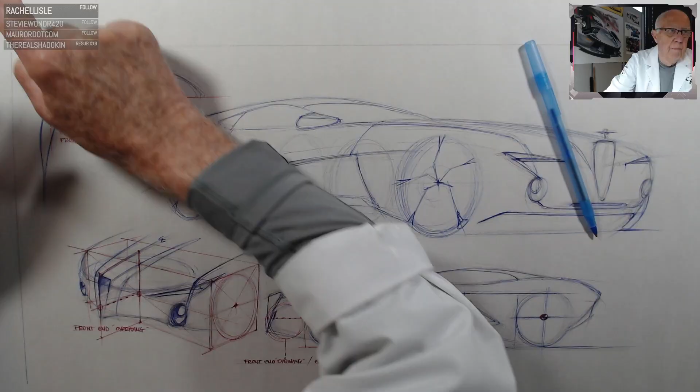I think this has been a really interesting set of programs. These last two sessions, we went through phase one and phase two. Phase one dealt with the box system, how to set up a 1, 2, and 3, and the automobile proportion work, and how to work it into a 1-point setup. Then this past Tuesday, we went into a 2-point series covering how to put the proportions together, getting the wheel counts down, getting the widths correct, and how to use facing planes and other elements to determine good proportions in vehicle design.

Again, it's not just about transportation design, but good fundamental thinking and using perspective as a solid tool is an extremely powerful and helpful approach in every single case. As I said Tuesday during that whole program, I think one of the most important things is that if we have a good fundamental understanding of perspective, how it functions, and the rules that are set in stone and truthful, and if we understand how to work with those, it's extremely liberating. You know where you are at all times, and you have a good understanding of how to move things through a crisis or difficulty that might come up.

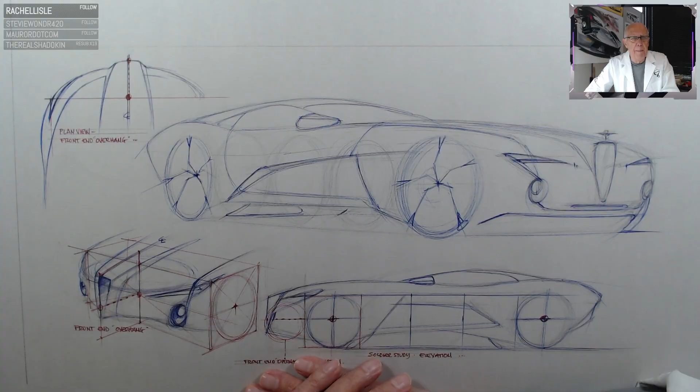So enough said. I think it's really interesting that we've gone into phase 3 today, and I'm going to spend some time on this stream. Hey, Shadokin, how are you? Good, how are you doing, Chief?

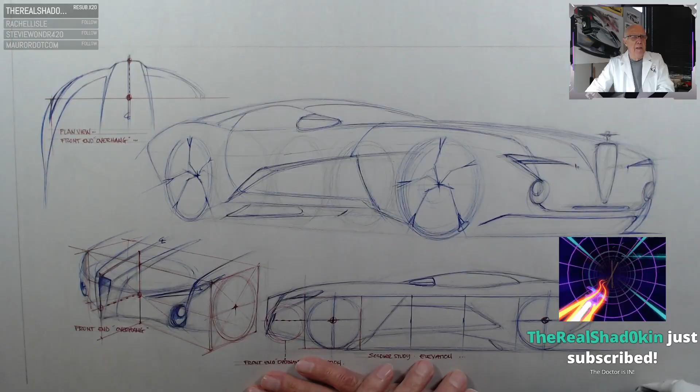Thanks so much for the subscription, it's good to have you on board. Hope you're doing well, Shadow. You're working at home today? I'm trying to come back and survive here with phase 3 and some transportation stuff. Yeah, it's good to see you too, Shadow.

But I think it's important to go back and look at this whole discipline from the point of view of how fundamentally solid it is to get the proportions down. Working with a lot of young people over time, even in lectures and workshops, I had a lot of questions about how you set up the wheel program, how you set up the proportion, what the width is like, how you do these things. So that's what motivated these last 2 or 3 streams.

And this is phase 3 today. As I said earlier, I want to concentrate on 2 things basically in the stream today: reinforcing the idea of 3 wheels in between the perspective.

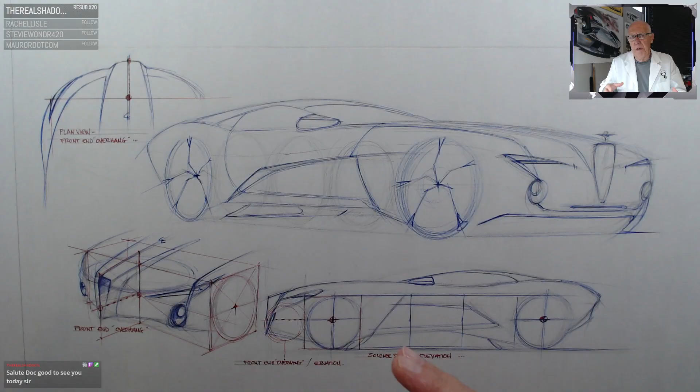Hey, hi Rachel, how are you? Good to have you on board. I just noticed you picked up a follow here, Rachel, and I'm really glad to have you on board. I hope all is well with you. Are you home back in Carmel now, Indiana? If so, congratulations. Super to have you on board, and thank you so much for joining me today.

Even though this is a transportation design exercise, it still applies to a lot of different things you're dealing with in product design, architecture, interior space, and exterior design as well. So we'll take some time to go through some things. I really want to stress how critical it is to get that wheel plant down, the widths down, overall heights and proportion. And the most important aspect we didn't talk about on Tuesday, but it's very critical as well, is how to work with center lines, how to set up a center line and work through it, how to let that determine how proportions come together.

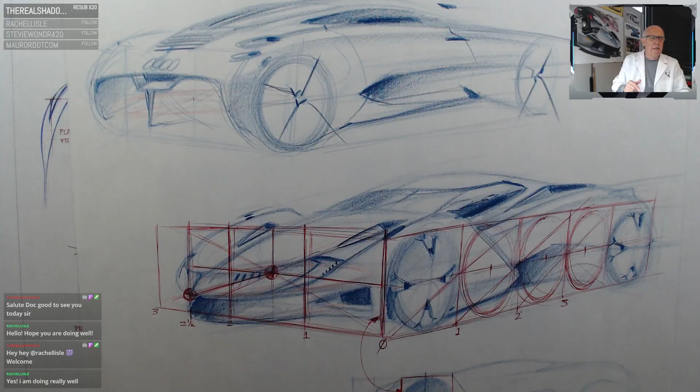This is something we did on Tuesday of this week, and I really want to bring this to your attention. This is again the beginning of how to set up a perspective program: getting that leading edge down, coming back in perspective with the drive line, then coming back 1, 2, 3 wheels to get those 3 wheels between the front wheel, and setting that rear wheel down.

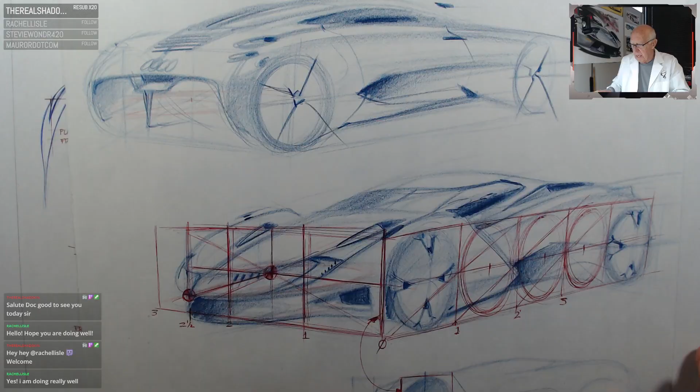A good friend of mine called me Wednesday morning and said he really appreciated how I explained setting those widths up. Let me show you what happened here. The reason I'm bringing this to our attention is that in this conversation, when I was working through it on Tuesday, I came out to this leading edge area, but I used the center line.

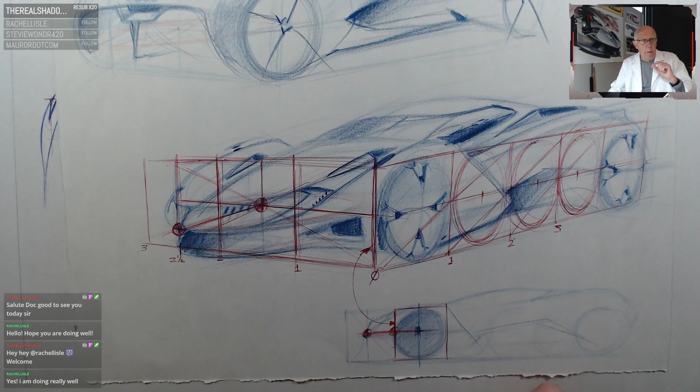If you notice this elevation down here, to get the overhang set up, I came through the center line of the wheel, which is back here. Well, truth be told, my apologies, that should have come off of this facing plane here, which is out here, not back at the center line.

So I want to make sure I clarify that before we get further. You can go with the center line, that'll work, but it sometimes gives you a real long drag from the center line to the overhang.

It's much easier to come back to this facing plane right here, which is now called a facing plane in 2-point perspective. Find its perspective center, which we did here. Then from that point, notice it's the tangent of the tire out in perspective, draw that point, and then right back in perspective and bring it forward. There's my overhang right here, which is now reflected from here to here.

So I want to make sure- hey, Rachel, how are you? Rachel from Cincinnati. I've got Carmel, Indiana, and Cincinnati all in the same group. Hey, by the way, Rachel, did you get the sketch I sent back to you yesterday on the little product design piece you sent me? Hopefully that worked out okay for you.

So again, back to this conversation. I just want to make sure I clarify the error I made on Tuesday about using the center line as opposed to the facing plane edge off this leading edge in perspective. To illustrate, this is where it really happens off this facing plane. You come forward in perspective like we did here to pick up the overall overhang, then come right back to center line and work that shape right through. So that's where we started there with that guy. I hope that clarifies the situation.

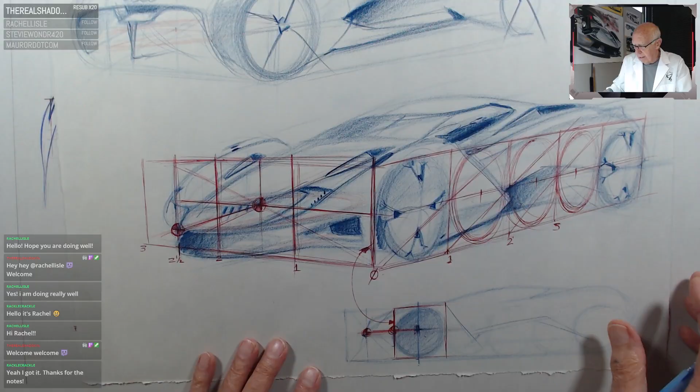Before I leave the sketch, I think I plotted it out a little more accurately. Traditionally, to get the right width, good news, Rachel - thanks very much, I'm glad you got that, I hope it helped you. But I think the thing that's unique about this sketch is I went back and put some notes on it.

The question came up yesterday from a good friend of mine: how do you determine the widths? He said he was amazed at how I opened that up and set that up. Now, I want to be careful here - the width is set up on the cube basis. This is the face of a cube on the right-hand side, face of the cube on the left-hand side.

If you set that cube up on the right-hand side, then its partner is to the left. So always remember to come back 1, 2, 3. Now, a good width is to set that thing right in half, and then at that point it becomes two and a half cubes - the face of a cube is a good way to set up that width. We'll go through that throughout the course of the afternoon so you can see how that begins to function.

Now that doesn't mean it's set in stone. For an exotic machine, lower, wider, you can open that up and stretch it a little bit, and I'll show you that a little bit later as well. But a good rule of thumb is to always keep in mind 3 wheels between the actual wheelbase itself.

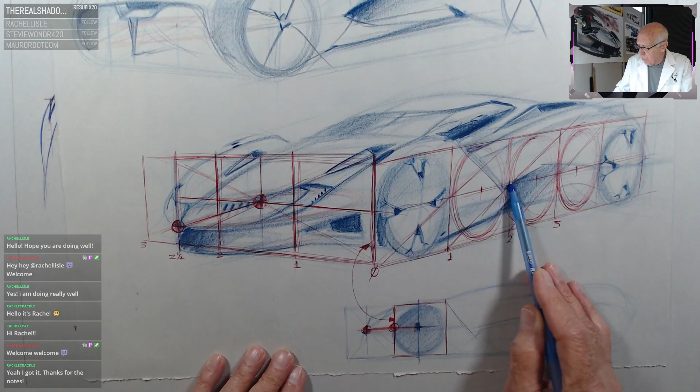So you plant the first wheel, go 3 back, and then set that 4th wheel in place. As far as width is concerned, come back 1, 2 to 3 to cut that 3rd cube in half, and then there's your center, there's your width right there. If you keep that inside that boundary line, your proportions are going to be very solid all the way through.

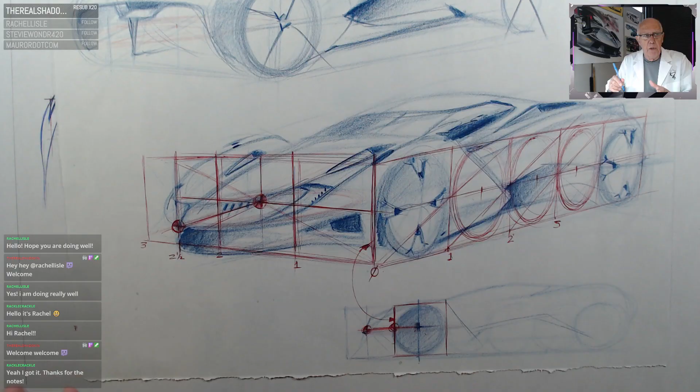And I think that's a critical point to get across, because there's nothing worse than setting a perspective study, for example, that has the right proportion and wheelbase, and all of a sudden it's too narrow or way too wide. And that's a real big problem.

Another interesting thing about this whole setup is that once we establish that width and get that center line to work here - when I started here, I went through this radius. I used that circle inside here to determine where that point of reference was for overhang. And I came out of that and went right back through it again. What helps me do that is this.

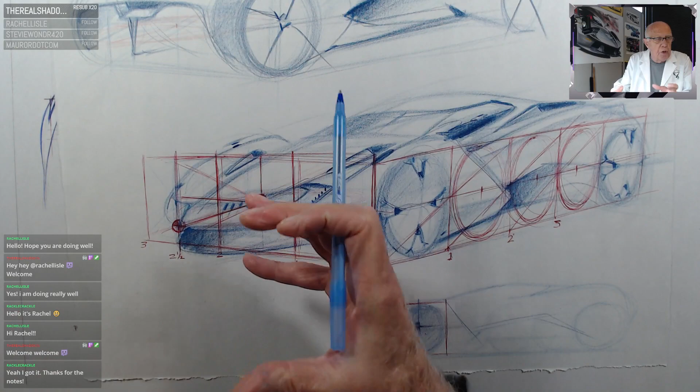Notice I see an awful lot of the headlamp graphics over here. But as this surface rolls away and comes away from my eyeball, or my sight line, nothing gets, it all disappears. But so often, if we're not doing this properly, what happens is we see this lamping system here, and we want to do the same thing on that side, which really twists the whole thing, and the whole sketch. That's what really becomes a real difficult issue here.

So again, I just want to go back and use this sketch as a clarification for yesterday's comment about, again, not the center line, but the facing plane edge. Run that through in perspective, find out where you are, then come up forward and begin to pick that overhang up from that point of view.

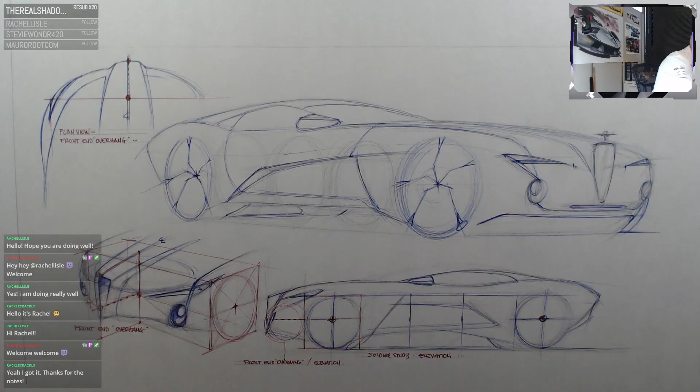So let's move ahead here. Let's move the sketch here. Let's get these out of the way. I put this sketch together again, real quick little thumbnail study here, a much larger sketch. Again, notice once I got that first wheel down, I went 1, 2, 3 back, got the rear wheel back in place. And this is a pretty good gesture study in terms of a typical process and elevation, or a little bit of 1-point perspective how it operates.

But what I thought was interesting again is I went back. Let me move this over just so we can see what this is doing right about there. How's that? Good? Okay. This elevation now begins to tell me that, again, notice here's my face of the cube. Here's my circle or wheel. Again, counting 1, 2, 3 back to get that 4th one in place.

But notice here again, coming off that facing plane tangent, that dotted line represents how much overhang I'm going to have when I go into perspective. And I'll show you that in just a moment here. So that overhang becomes very critical.

Now, this view here, and again, perspective shows us this. Here's that leading edge. Here's that facing plane I'm referring to right there. So that then now I find its perspective center, which is right there. And then from that point, come out in perspective. Notice that perspective line is, let me draw this for you here.

That perspective line follows the same suit with the drive line out here. Notice perspective, perspective, perspective - they're all compatible. They all go back to that vanishing point that helps us begin to operate here to put this thing in proper perspective. So once again, facing plane, and again, use that circle again for overhang.

How far I'm going to come out. I came out in space, that distance, found that vertical, and from that point began to build the rest of the shape around that whole form. So again, here's a good illustration.

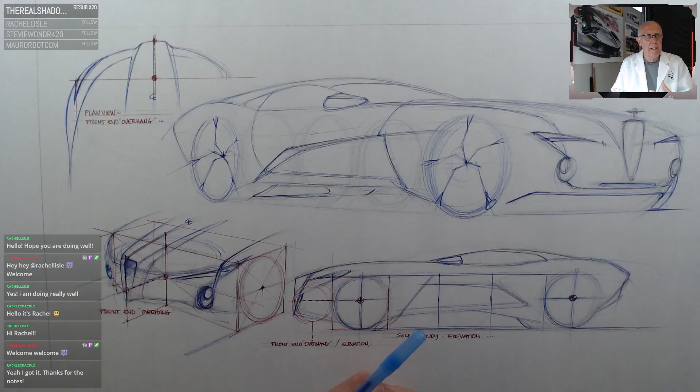Again, that facing plane becomes critical. I step out and get my overhang, and I begin to build that surface around that. And another way to look at that, here's a plan view of that whole setup. Here's that facing plane. That point there is that same reference line here. So what I've done is come right back to center line, stepped it out, which is now this distance and also that distance, created the shape around it, and again, right back in and used my center line here to build the rest of the form, which gets into this little hood graphic element that we see on top here.

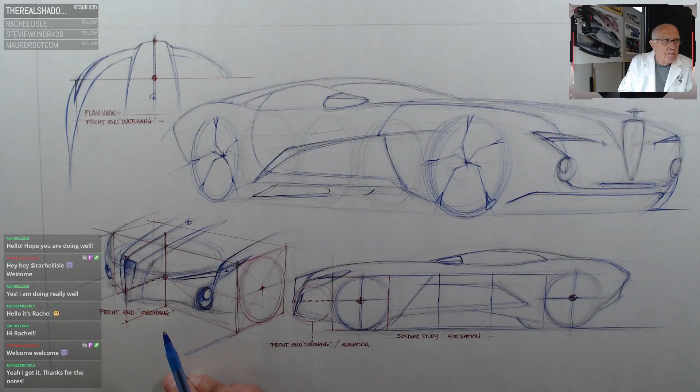So I hope that begins to tell us, for example, the reason I started with the sketch here today is because what it really dictates to us and cries out for us to think about is this: when you're dealing with a two-dimensional surface like paper, think in the third dimension. What does it look like in the plan view? What does it look like in perspective? What does it look like in elevation?

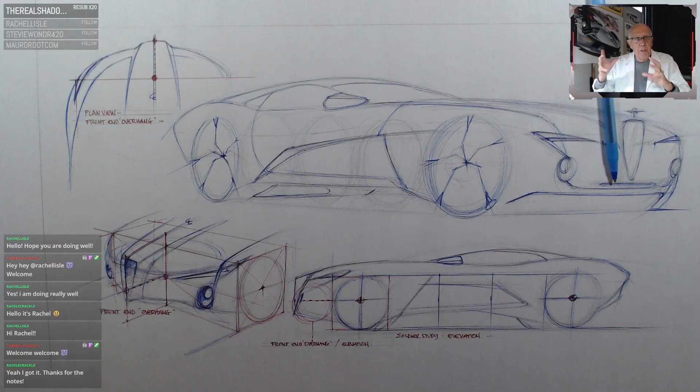All these elements are coming together, and it's exhausting in some respects, but at the same time, if we teach ourselves to think in that third dimension, all of a sudden things begin to open up, and you begin to see how one step goes to another and how one leads to another.

And I will not deny one iota here, the beautiful thing about perspective and understanding it, the more you begin to understand it, the more you can flatter it and make your sketches far more powerful. You can take advantage of what you understand. And I've always said this over the years as well, with a lot of clinical work, I make this very clear.

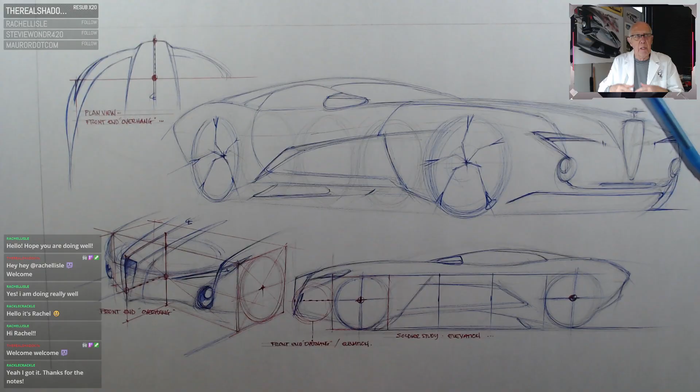If it ain't broke, break it. Just break it and go in there and look at some things that are much more fundamentally sound, from the point of view of really not exasperating yourself, but liberating yourself from the understanding that you've got it now and you can put these pieces together.

So I think this phase 3 piece today about getting spacing correct, widths correct, and using center lines to develop the proportion of vehicle design is going to be very, very helpful to you. So I'll come back to this in a moment here.

Let's go to this, a couple of sketches here. Now let's go to this guy. Lay these out ahead of time so we can get some good conversation and hopefully some chat going together here. This is an isolation here, for example, of what we're talking about.

This would become my leading edge right here. Now I'm going to go to widths. This little illustration here helps me get to the widths now. Now that I've got the circle in place, I've got that face of the cube, I lay that in place.

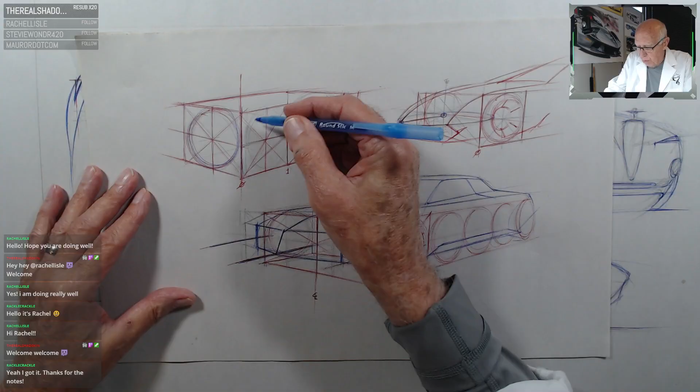I come again, this is now the left-hand side. I'm going to come to the right-hand side and create 1, 2, 3 back. Now we're going to find that perspective center and open that up, and that point right there, that designation right there becomes my width. Now we'll show you that in a moment.

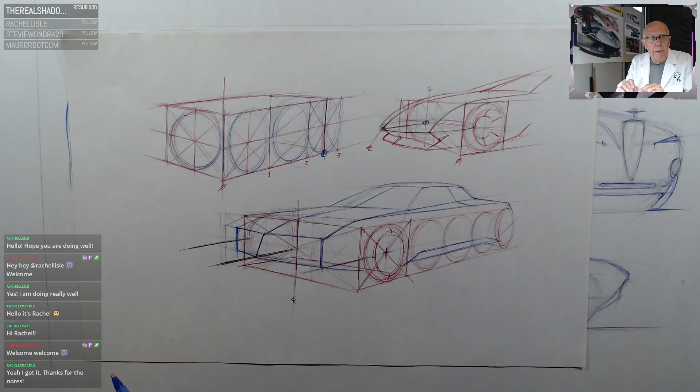Just a couple of illustrations here as to how to begin to put that into practice. We're going to start looking at not only the width proportion, but how to set up the actual scale and how to develop perspective using center lines, how to guide our way through these sketches.

Now let's turn it around here. Same thing. This is now my leading edge here, my 0 reference. I'm coming back in perspective here. There's my face of the cube. I come back in and rotate that out.

Now notice, once again, I'm drawing through it, and there's a backside wheel over here, but notice there's a circle in place here. Again, let's use that point of reference. See that point right there? I take it across in perspective, find my center line on that facing plane, drive it up, put that circle in place, that tells me where my center line is.

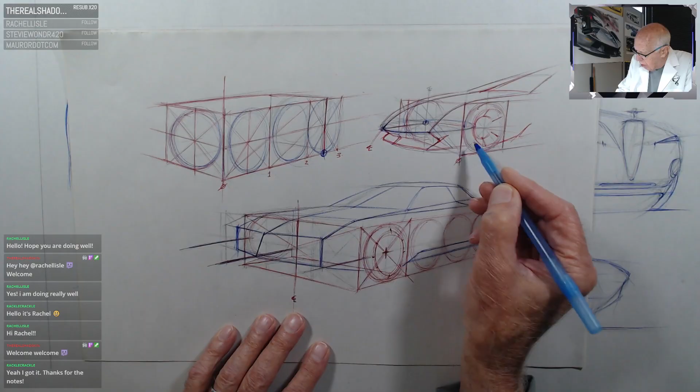Now that I've got that, I can take that center line and come right on up into the form, into the windshield, into the far pillar, closed pillar, body form. Again, come back in section underneath and roll that right out of there and get this shape, simply putting it in place. And I think that's the beauty of perspective.

Once you begin to see how the geometry works, the sight envelope opens up, and all of a sudden things fall into place naturally, because you've got a footprint to follow, a section form and an element to deal with, as well as getting the proportion right in the wheels. And again, the center line is very critical. So that's one being very organic.

Let's go a little bit sheerer here. Same setup. Again, facing plane, face of the cube. Get that one wheel down, 3 back, rear wheel. Now draw through it, pick up the width.

There it is. That's actually 2.5 back, because there's my first one, here's my second one, here's my third one. And I've cut that right in half, and there's my point of reference right there.

Now, same thing. What I've done here is come off of this shape and pull the line out in perspective. Now, my facing plane is right there, so I'm going to come back from there out to the right here. There's my overhang right there, that line right there. I'm going to fill that in. Here's my overhang.

Off of that normal facing plane, that's it right there, no problem. I've just moved it from that reference to that reference. That tells me from that front face there, I've opened that up considerably.

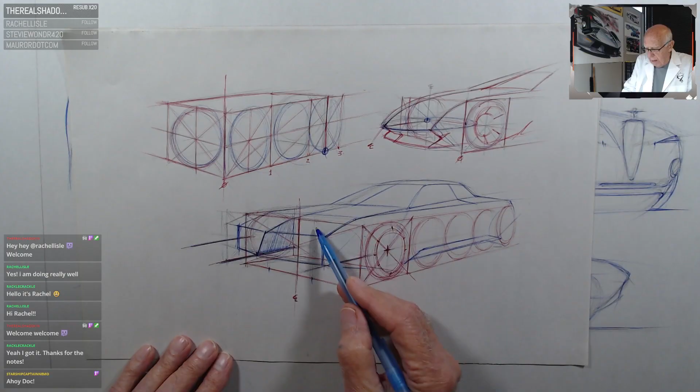Hey, Captain Nemo, how are you, man? Good to have you on board. How you doing? Thank you, sir, for joining us today.

This is just phase 3, getting some transportation design work done using the fundamental geometry of perspective to create aesthetics. I think that's what we're after here, to get the widths down, the lengths down, overall heights.

And again, notice once I have that whole overhang set up here, now I set up a section, come right back. Here's my center line, notice right back to that contact point, which is right there. Back to center line, up onto the hood surface, into the windshield, and then over the top.

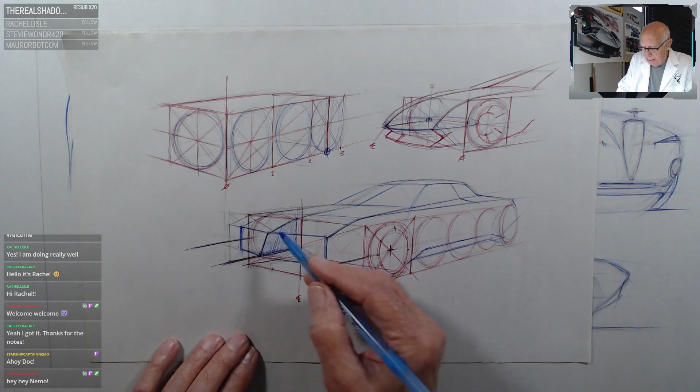Now I can use that as a setup here. Off of that set, I come out here at section, draw that line through, pull that line through into ground clearance, draw these lines through, and get these proportions all set, and it just all falls into place because I've got a clue line here.

Hey Nemo, good to have you on board.

So I've got some steps and some reference points here to really do some interesting work with.

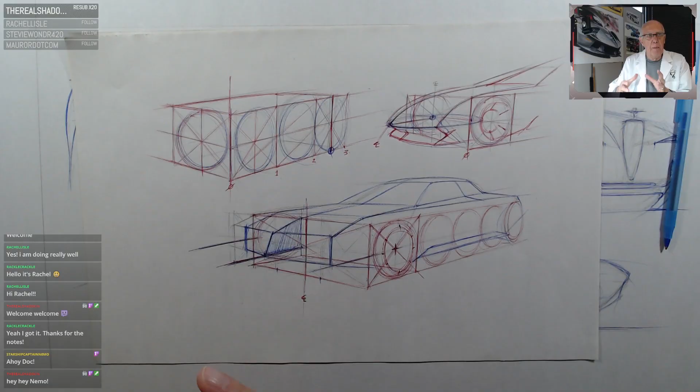It all comes down to understanding how the geometry works and how to work with this stuff. I'd rather know where I am as opposed to guessing where I'm going. I want to know step by step what's really beginning to happen, especially with something as complicated as transportation design. The more we understand how perspective works, when the mechanics begin to operate, the more fundamentally aesthetic we become, because now we understand it, we can apply it, adjust it and flatter it as we go.

So there's a little study there on basic setup for getting that overhang squared away. Next sketch up is this. I've done this ahead of time to save some time, looking at basic formats for SUVs, pickups and so forth, and how they all begin to work together. This phase gets a little more complicated, so I'm going to take some time to go through it, showing each step along the way—where I got those widths, how I got those lengths, and overall heights.

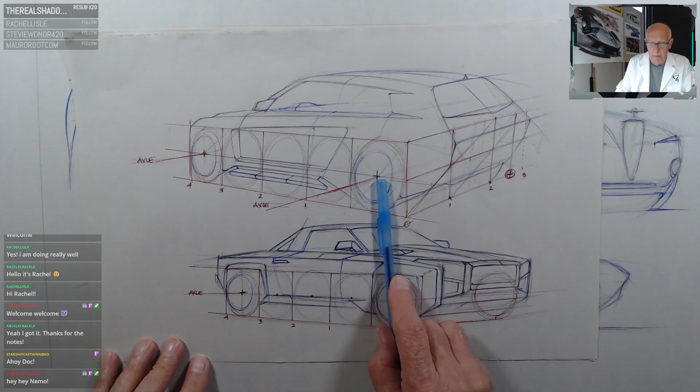Once again, I started here—here's my leading edge, I'm standing right here looking at this vehicle. I'm going 1, 2, 3 back to get that fourth wheel in place, driving an axle through in perspective. That's going to tell me how to put together the wheel geometry. Now that I've got that in place, I can come across here and go 1, 2, 3 wide, come back to center line, pick that up.

There's my overall width right there, which tells me where the wheel's going to be planted. I draw that through. Now I come back to center line off of this shape—if this now becomes my center, I'm going to open that up and really begin to draft that through and open it up a bit. Notice the overhang exceeds the width of the vehicle—that's fine, that's your rear overhang, that all comes into play as well.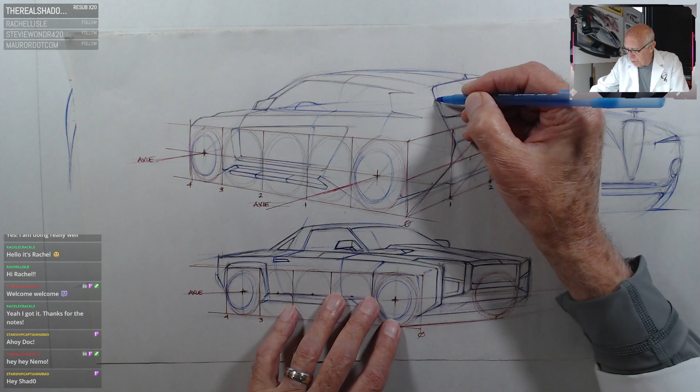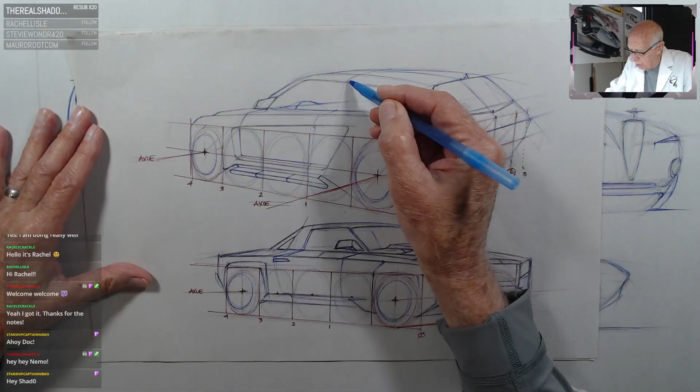Notice I'm coming off this backlight down to a break, into a lower, into a break, and I take that right across in perspective, drive it under and come back underneath it, beginning to use that center line. Everything's coming back to that center line as a result of knowing where that width is concerned. Back to upper, through it at the center line, using that as a contour into section, into shoulder, into contour section—how it all begins to fit together. Learning how to see, it all comes down to understanding what the side envelope does.

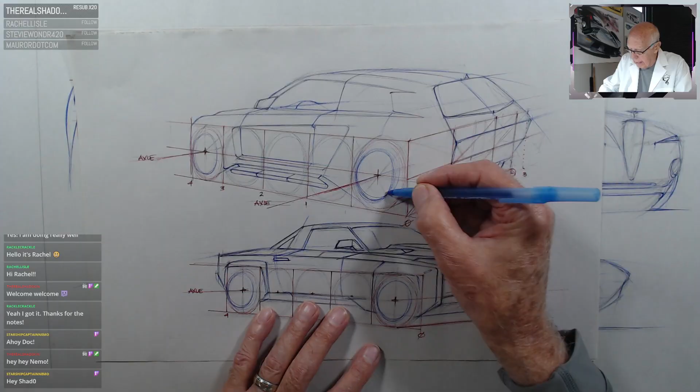Let's go through here—the reason this axle is so critical is, now that I've got that, I can come back in. If I want to drive the axle or wheel geometry back in space, I'll come back in here and go into the negative. Now that tells me that section comes out, goes in, comes out and back out again. Now that I'm here, I can come back up vertically—that drops back, about right there. I can come up vertically, put the wheel geometry in place, that told me how to set that rim up, for example.

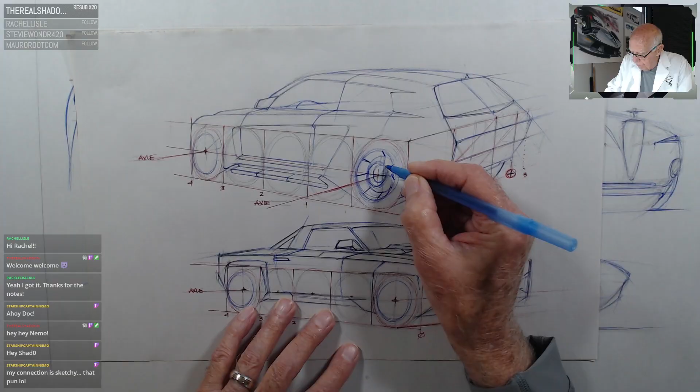Now I can go back up. If I want to come back out again, it's now this—that section now changed from that, in, up, across. If I want to go back inside again and begin to use those elements. Look how that whole process set up, that whole setup—my connection is sketchy, that pun.

Hey, it gets good—but see how that all begins to operate? Again, using the same principle up front here, let's go back in and set it up. Back in, set it up here, center, break it, come back out again and set that up. Now use those elements, get a bit more graphic, and come back out again.

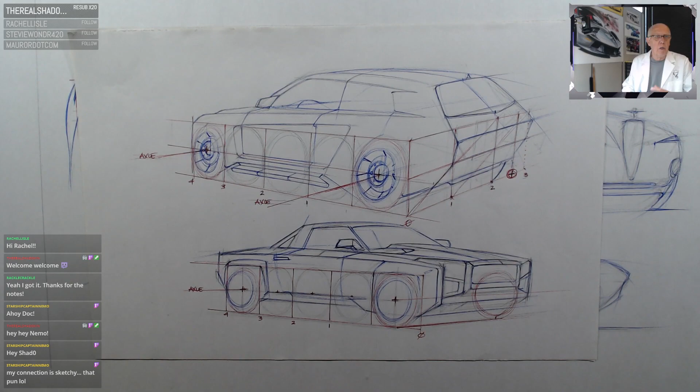And again, take that back inside, then go 1, 2, 3, and I get that same detail up front there. All of a sudden, it all comes together in terms of putting this together. Notice the geometry—even in cases like doing wheel geometry, it all begins to come down to understanding what the axle does, and every one of those circles are concentric around that basic wheel, as we started here.

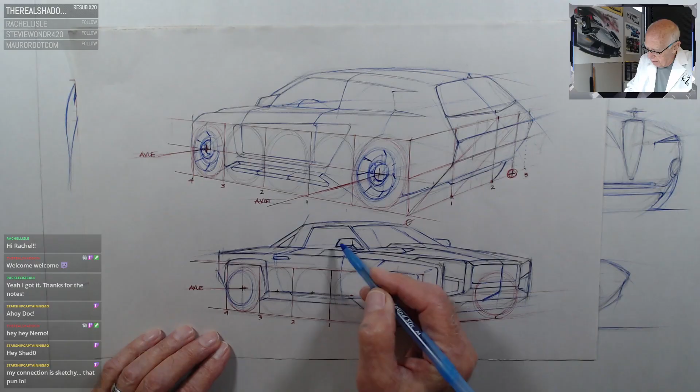Now let's move this guy here. We'll pick up the same process again—3 back, getting the body form in. Now notice here's my center line, so I'm going back in here. There's my center line. It comes down to that point, rolls underneath, comes up over the top. This is a tight view here, but that center line goes into the windshield, and over the top, that center line has told me how this windshield gets wider, narrower, back in again, over the body section, comes in.

And all of a sudden, it all comes together, using that whole geometry setup to redo some interesting things with the actual shape itself. Very, very unique stuff, folks. Again, how critical it is to come right back to the simple elegance of letting perspective do its work for you. It just cannot be denied.

Let me stop here—any questions so far, anybody? Am I going too quickly, or is it making sense? So far, everybody good?

Once again, we're not talking about flamboyant design here. We're just talking about fundamental truth and putting it all together so we can get a better understanding of how all of it begins to function in terms of putting together the geometry.

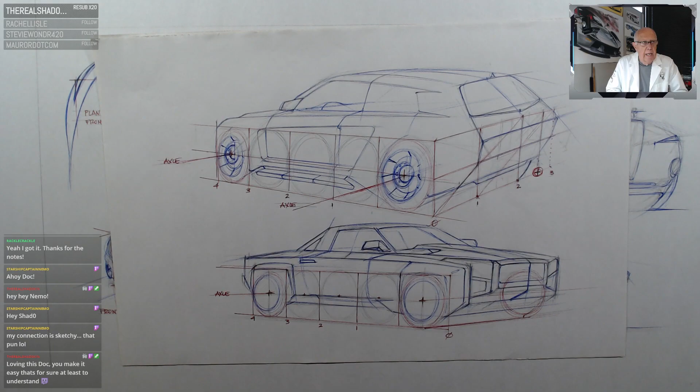And again, loving this, doc. You make it easy—that's really, I hope that's the case. Thank you, Shadow. I mean, I do not want this to become an absolute mind-bending headache in terms of having to remember all these pieces and parts. There's a very simple truth to it.

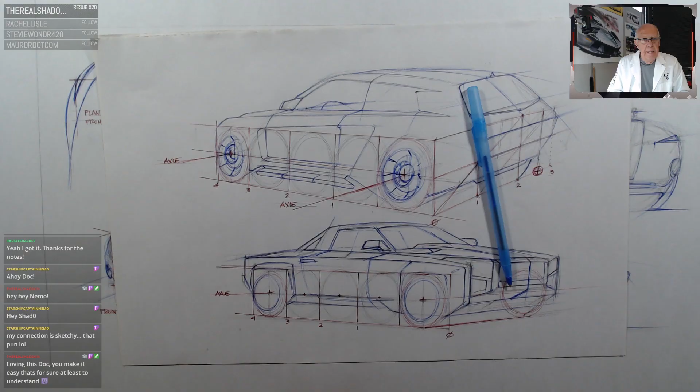Get the wheels planted. I remember guys like Homer LaGassey and Syd Mead, the whole process they taught us in transportation design—once you plant the wheels, everything else coming up off of that from the ground line is correct, because now you've got a good base to work from. You begin to go back to the center line, you build the shape off of that, and it just becomes so much more monumentally solid.

So again, good example of a rear 3/4 view, how to use that same process. Notice, one last thing too, how that whole process of putting the wheels in place begins to taper. Notice it's larger here—as you go back, it fades a little bit and gets a little bit narrower. This width here is a little bit narrower than that width there. Again, that's what perspective does.

Yeah, Nemo, making sense? When I see you doing it, I'm like, how the heck could it be even different? But when I sit in front of a blank sheet... you alright? No, you're doing well, Nemo. I think some of the work you've done has been very inspiring to look at and see. So it makes sense—that's good.

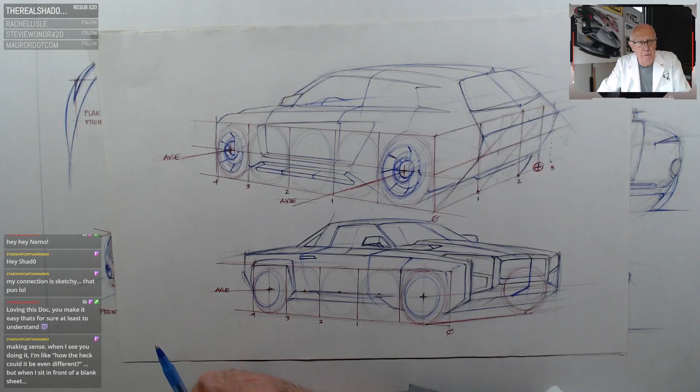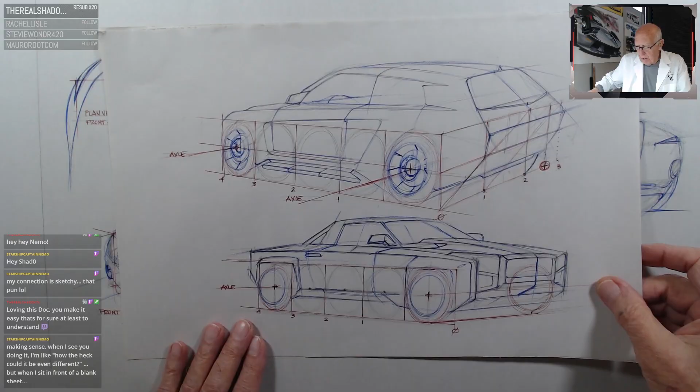It takes an awful lot of conversation to kind of put the pieces and parts together. But I think once you talk about it and start to see how it operates, which we'll do in a moment here, it really makes a huge difference in terms of—oh, I see, it's now this to this to this. So each is a synchronizing system; one thing connects to another. But I'm convinced with all my heart, over the course of my career, it's just been so powerful to know

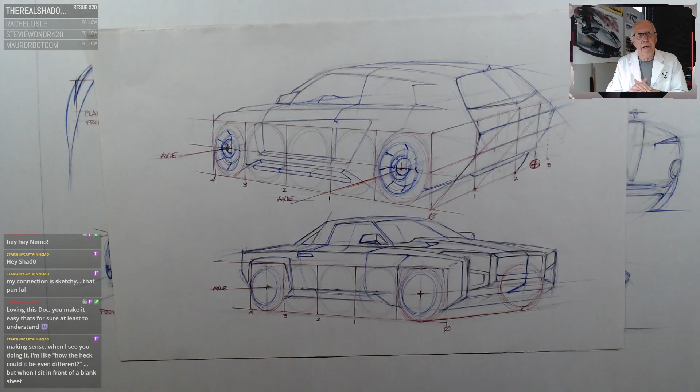that perspective becomes a genesis of illustration. A lot of us try to illustrate something by just guessing at it, and oftentimes we get extremely frustrated, and it just doesn't really work out for us—that's a sad situation to experience. But now if we go through this whole idea of understanding, let's get the geometry right. And again, as I said earlier in the stream, once the mechanics is set, the aesthetics comes in automatically.

So let's move ahead here, and we'll come back to these in just a few moments. Go back and get these guys—there's a little pencil sketch. I want to use this for a moment here, just a real quick sketch. And again, come back in and just reinforce.

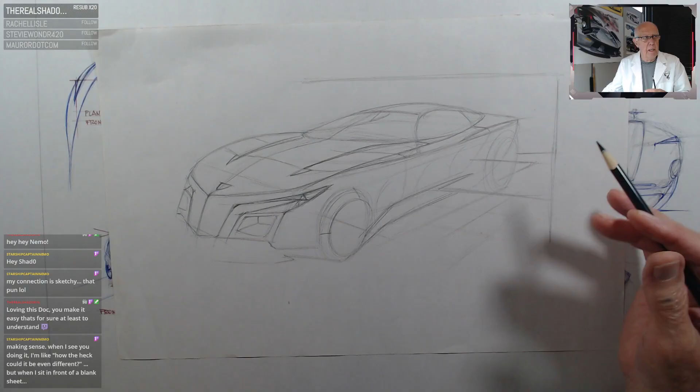I'm going to switch gears here and go to this. I'm going to go back and use some pencil work here. Let's lay this down and put a little more tone to it now, and add another dimension, for example. Now we've got the proportion set. I'm going to take a simple thing like a light source and just illustrate a few little simple things to kind of bring this sketch to life. So let's go back in through here and set the wheels down.

Come back in through here. And again, remember, this sketch was set up using the same process we've been talking about for the last few moments here.

Let's talk about line weight. Get that weight up and then let it disappear. Let's come back in through here, let it disappear. Come back into this tire.

The body form. Take it back out again. Notice a little bit of a spear here. Let's take that into place.

Blister back here. Notice backside line. I'm going to let that go. Notice that weight there, far more different than that is.

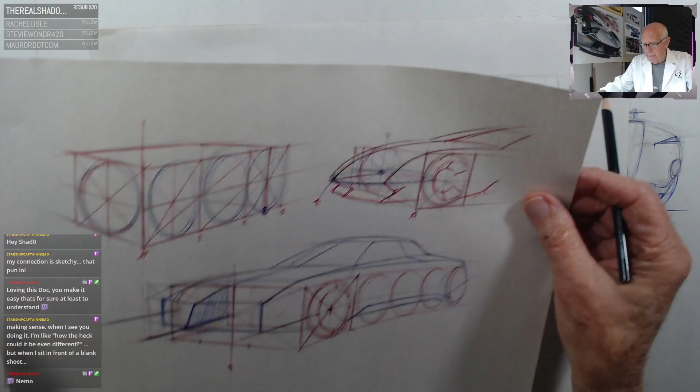Let's come back in through here. There's my reference line here. That line right there is the very same thing we talked about. That reference line right there is the same thing we talked about right here. That point right there. There's my reference line.

If I come down vertically, that's going to tell me where my overhang is. So is that making sense? Very good. Hopefully that's making sense, gang.

Let's carry on here. Let's come right back to the center line. Notice, now that I've got that set up, there's my center line. Draw it through, into windshield, over the top. Again, into fender line. Let's bring this through here. Let's get some of these elements into place.

Pardon the silence here. I'm just going to work on some things.

A little bit of ground shadow.

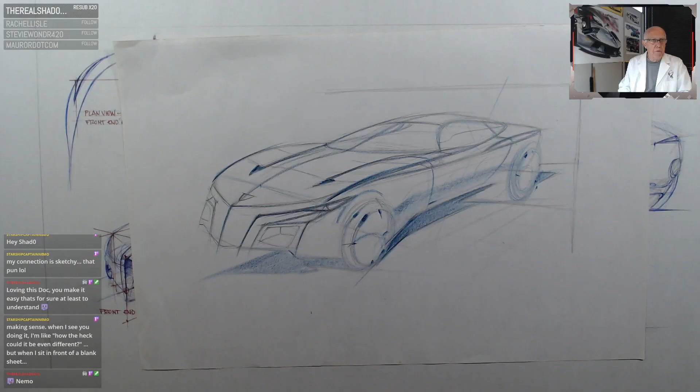And it comes right back in again here, and then draw it right through, and then step it out again, and just let it go. There's a simple little change right there.

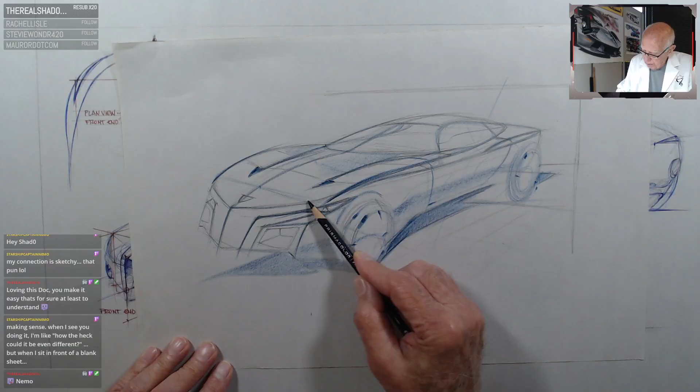Up on top. Now that my light source is coming from behind, that means I can come back in through here and just tone this in, lose it a little bit, come across into that surface here, and again, widen the light source a little deeper in the windshield, take that across.

Now, horizon line, a little bit more boldest, come back in through here, pick up a little bit more pencil weight. Fill that in, and back in through here.

Little front end graphic.

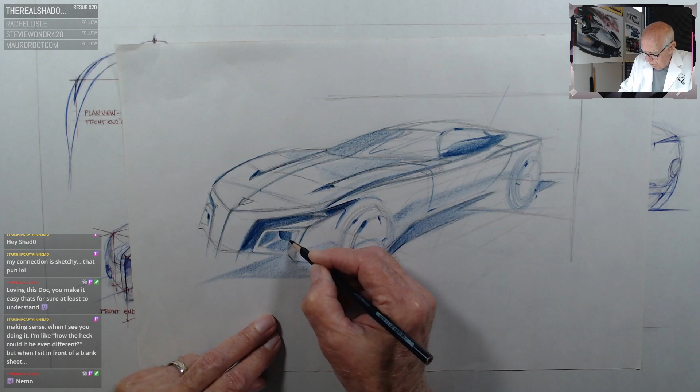Again, coming back in, notice the angle of light, same thing. Shadow. Line weight. And notice right away, that form comes out of the paper. It's very simply done, but hopefully it gets a point across in terms of where that light source is coming from.

Now, back in through here, I can go back in and tone a little bit of the surface, run that in place, put a little bit more secondary line in through here, pick up the windshield graphic, a little bit more tone, come forward, bring it into that forward, and there it is, just a simple little detail there.

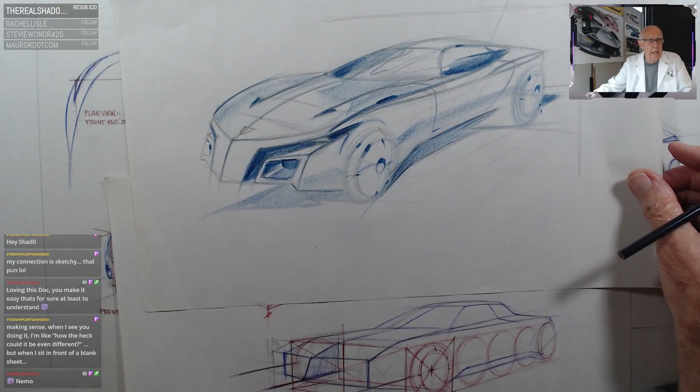And notice shadow, into shadow, and again through, out. Very expressive, but at the same time, all put together on the fundamentals of just letting all of this stuff come together for us. Let me just see if I can get these to work together here. There's one up on top here, and this one down below.

Well, maybe not, let's do this. Now they all begin to work together. This whole process here is a result of knowing a little bit about what this is doing down here. The only thing I've added now is light source and volumes, which hopefully at some time in the future we're going to add to it. I'm going to let this kind of roost a little bit here and work with you guys to get this whole process of proportions down with perspective, center lines, wheel count, and so forth.

So let me stop there for a moment.

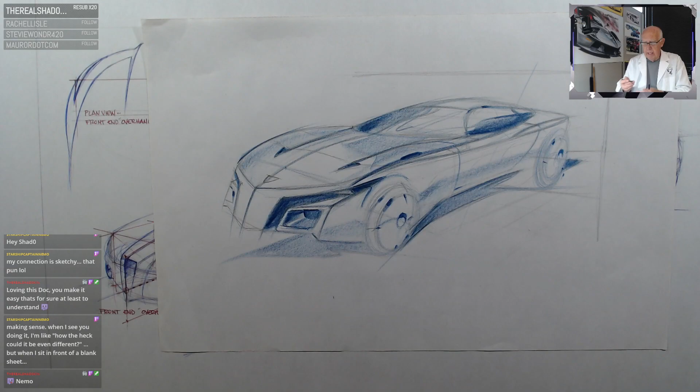Let that settle in. But I just take a little jump ahead here today to show you what might be coming down the line in terms of getting into tone, light source, and volume, and how to work with it. Any questions from the gang in the chat? What do you think, is this making sense? Coming together, how one begins to lead into another. I think the magic of this whole process of perspective and proportion leads us to do things like this. I hope I didn't jump too far ahead with that conversation.

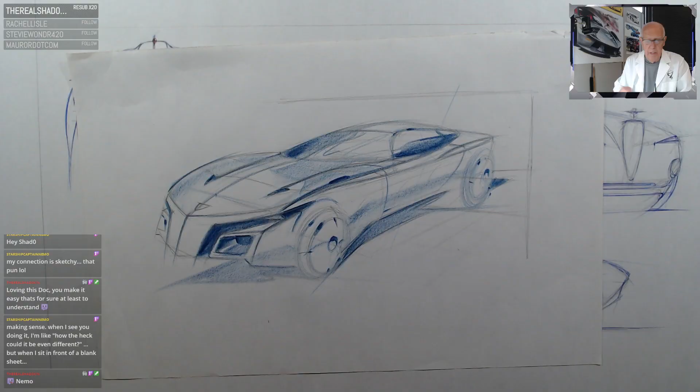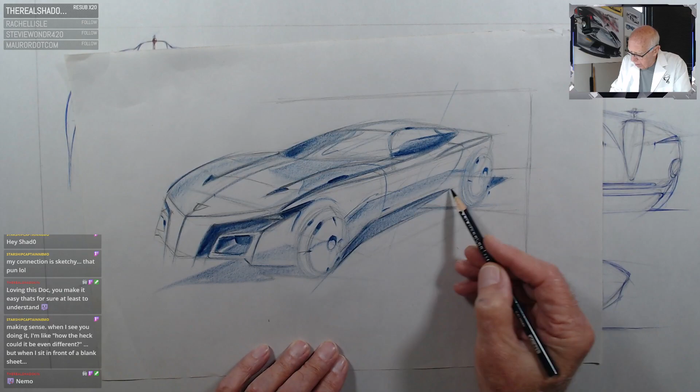Let's put a little bit of tone in this and kind of kill that back, just so that all varies in here. Then you can get back and move with the line weight to flatten what the forms are doing. Just let this all come together. It's very unique in terms of putting it all without a lot of effort. Very simple, notice how much paper is opening up there. We'll get into that later on as I go here.

I'm going to be quiet just for a moment here. Please feel free, anybody, any comments at all. Rachel from Cincinnati, Rachel from Carmel, Shadow, Captain Nemo, what do you think?

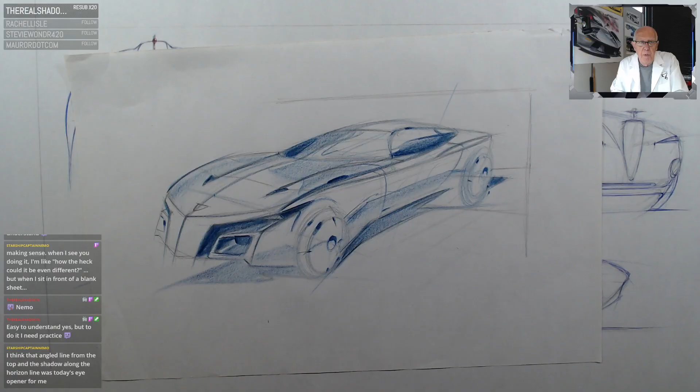I think that angled line from the top and the shadow along the bottom, along the horizon line, was today's - yeah, could you clarify that again? That angled line from the top - oh yeah, this guy right here on top, that becomes my angle of light or direction of light. Pardon me, along the horizon line was today's - yeah, now that I've just dropped that, and that tells me where that shadow is going to drop off of that form.

So if I put a section in here, the shadow really kind of blisters out like so, and that white point tells me where that shadow is. Now this direction of light tells me that the light's coming from the front. The direction is from the front, but the angle is very severe. So the two work in harmony.

We'll get into that stuff later on as we go down the line here. So, but the point is, is it helping? Did I make it clear for us here, Shadow, or pardon me, Nemo? So far so good? It's basically the tangent. Yeah, there you got it. Tangent to the door, you got it.

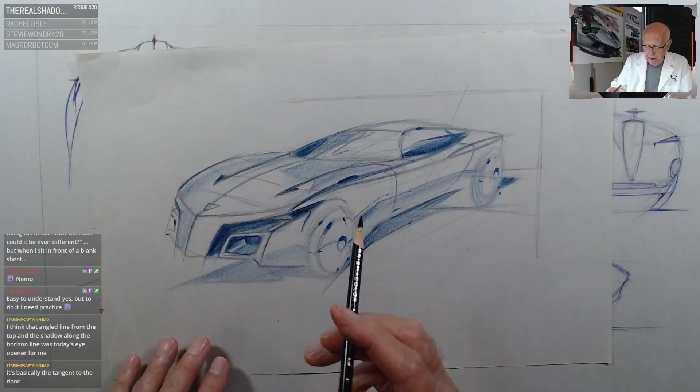Exactly correct. Now I can come back in through here and add a little more tone to this guy, just not to kill it, but to kind of put some surface work together. And again, line weight up front, and let that delve right into that little form right there. That comes back and picks up that widow's peak. There it is, and then out of it again.

Simple little structural pieces that come together here, folks. It's not a great design. I'm just trying to look at how the whole thing comes together in terms of putting all the pieces together we've been talking about over the last few sessions.

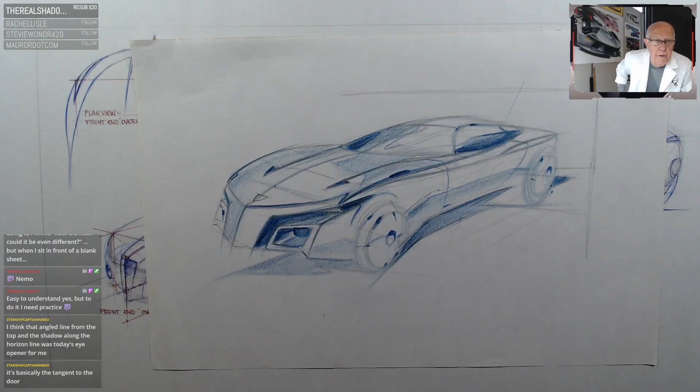Again, anybody, any comments at all? Hopefully I'm communicating this material clearly enough because it can get a little bit very confusing in a hurry. I do not want to be the agent of confusion. I want to clarify some things for us so we can work with it in time to come. Any comments here at all, guys? So far so good?

Well, I hope this is making sense. Let me stop here for a moment and chat a bit. This has been really good and healthy for me as well, because it's gotten back into the situation where, I hope I can say this in the proper spirit, I get to the place where it becomes so automatic that I don't think about it anymore. Please don't misunderstand, it's not an arrogant comment at all.

I've been taught to be confident, and I really feel confident in what I do as far as lines are concerned. Nemo, you are right, never noticed that. Yeah, the angle of light is a tangent to the door. You got it, Shadow and Nemo. Well done, and I'll cite that in a moment.

So what happens is when that comes together, it's just been unique, because I really feel strongly that good perspective is the genesis of illustration, and all these pieces come together as a result of that. So it's light source in the next series. The next series, away from perspective, is going to go into light source and volumetrics. For those of us who do this work, no matter the design discipline, it all begins to work together, whether it's vehicle design, transportation, product design, interior space design, architectural exterior design, or landscape work.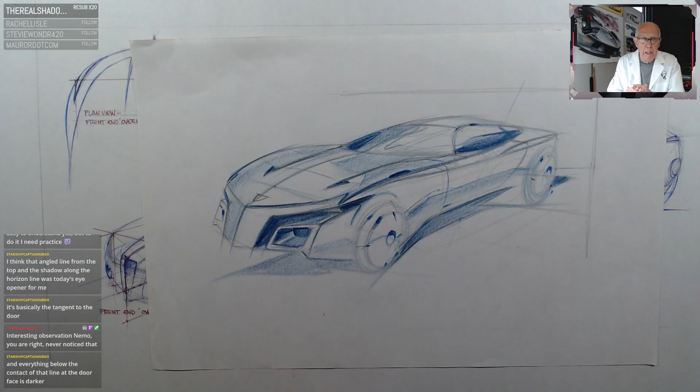And everybody, that line in the door face is dark. Yep, you got it, everything below that. Yeah, let's do this. You got it there, Nemo. Let's do a little isolation.

If I were to take this whole form, this is my center line. Here's my upper section form, and come out here to that shoulder and roll that out of there. I come down here to the base, and there's my A-pillar here. I come back into this shape.

And do the following: that angle of light is doing this, so that hits that tangent right there. As it comes down, everything into the light source, all of that stays paper. And this area here becomes reflective light. Interesting, so everything now below that, this whole area gets toned.

That's it, that's what happens. Now I can go back and notice I didn't come down to the base here. That little area right there becomes reflected light. So I can come back and go a little deeper with this and really accentuate where that core is and come out of it, but I'm not going to go right down to the base, down to here. That area right there, from there to there, is now reflected light from the ground coming back up into the form, which gives it so much more newness.

Helping, guys? There it is. So that rolls out of here, that comes out of there into my hood line.

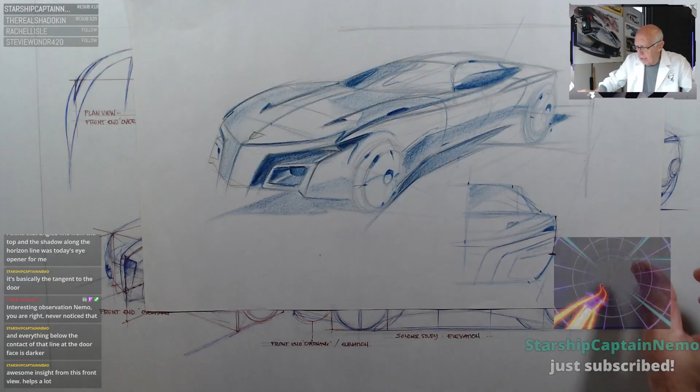This all comes back down to what's happening with this stuff here, so much. Hey, Captain Nemo, thank you very much, really appreciate it, Doctor. It's good to have you on board.

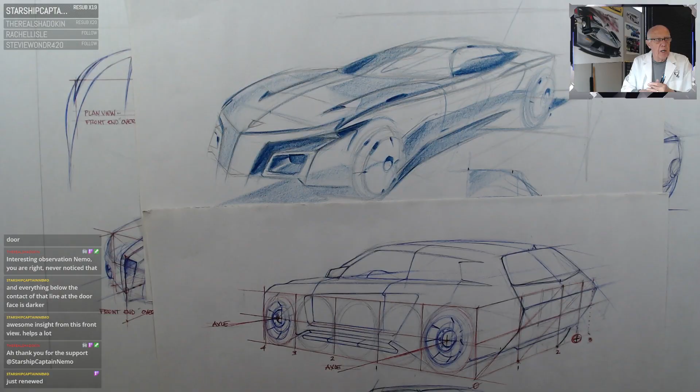Again, it all comes down to, notice how they all begin to relate to one another. Let's do these sketches together. This geometry helps us produce that aesthetic. Not a very great sketch, but it just helps to generate the aesthetic. And again, same thing down below. If I come back into here and do the same thing, and get that vehicle in place, no matter what your geometry is, whether it's pickup truck, SUV, coupe, or sedan, it all functions together.

And I just really want to know, I much appreciate it, Captain Nemo. Thank you so much.

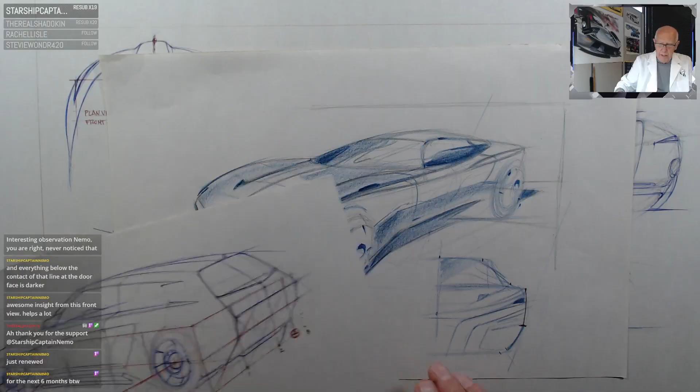So let's go back to this. Let's use this last example here, get this sketch out of the way. I'm going to come back to the one we opened up with, this little study. I can take that same set of circumstances, move this over just a bit so it's not in the way. With a very simple understanding of what light does, come back in through here and begin to tone this thing.

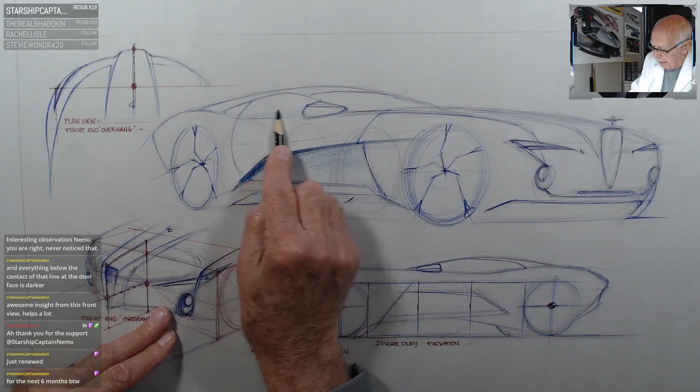Indicate where the shadows are. Put line weight into place. Come back over the top of the shoulder. Again, just a simple little study here: center line, in the tone, in the lamping graphics. Down below, take that form, now it steps back out of here, take it right on through into that. Tone it, bring it in, tone it, into line weight, into reflection, horizon line. Follow through, go deeper.

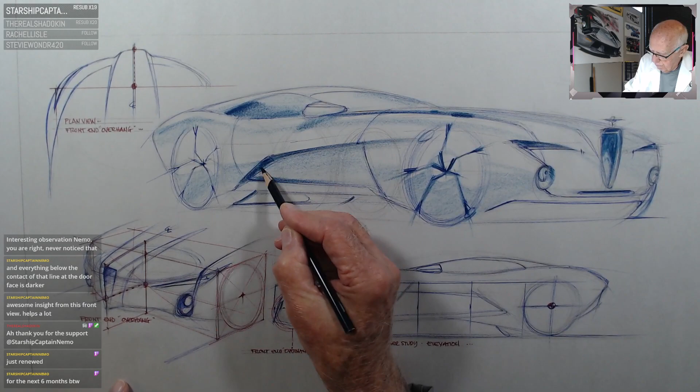And there it is, nice little line study. There it is, gang. So hopefully that makes sense.

All of this now begins to show what happens when you put a bit of light source on this thing and begin to create a very simple series of sketches here.

So you've been very kind here to follow along with me. I hope this is making sense for you, gang. And again, I'll stop here for a moment.

The next lesson, I'm going to give us a bit of a break to absorb this and get some questions coming in from you all. But I want to alert you to what's coming here. It's going to be a lot of fun with this proportion series and vehicle design work. I'll put together a couple of lesson plans on the next step, which is light source and how volumes work, and see how that comes together, plus light source, volumetrics, and how to shade and illustrate these surfaces, getting into some much more formidable and productive exercises in addition to just perspective.

But I want to make sure that this three-part stream has basically been to set up proportions and how to work with scale, size, widths, lengths, heights, center lines, all the essential things we have to deal with. And if we ignore them, then we've really done ourselves a disservice.

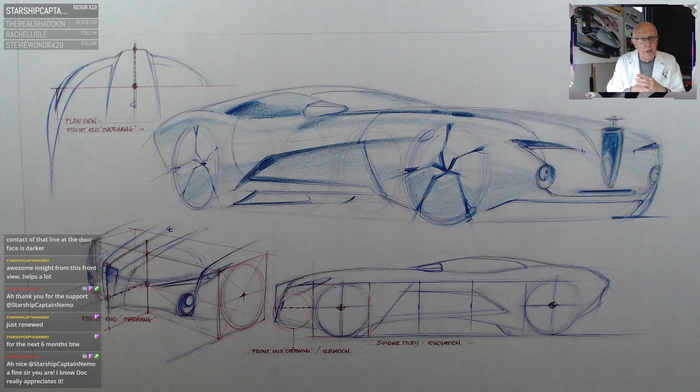So I hope these last three have really been of good help to you. And I just got to know, nice, Nemo, fine sir you are. Yeah, I do appreciate it, Nemo. Really do. I know you're coming in from Europe and taking the time to watch this, and I really respect your input and your time spent and the relationship we've built with one another, visually speaking, here over the course of Discord and chat and Twitch. It's been terrific for me. So thank you very much, Captain Nemo. Very much appreciated.

But before I depart here, I thought we'd take a moment to give you a couple of examples to make sure I don't want to be the author of confusion here. Let's go back to that first one we looked at, this sketch we did on Tuesday. Let's go back to this guy just for a moment. One of the things I want to make sure we leave you with a solid understanding of is this.

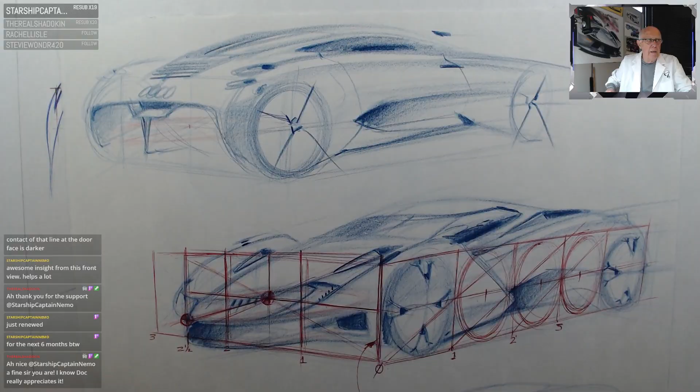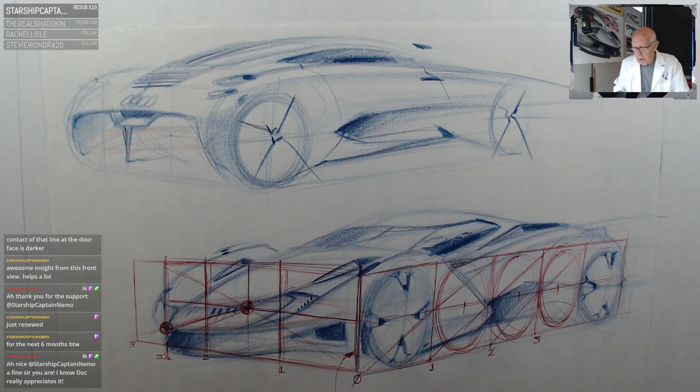When you come together with sketches like this, even though we're talking about 3 wheels between the front and rear, and just count 3 back and then go 2.5 wide to get the proper width down, that does not mean you have to live there. You can take exercise here. Once you get that proportion done, you start to see it visually, and it becomes part of the muscle memory. It becomes a very interesting thing to deal with. Now you can look at it from the point of view of how to deal with this stuff. You can now say, okay, I want a little bit wider, a little lower, a little bit longer. I wouldn't exaggerate too much, but I think it's really helpful to know that what I want to make clear before I depart this afternoon in this exercise and program is this.

Even though we're talking about the box system being the basic setup of 3 deep and 2.5 wide, with height and so forth, one on top of the other, notice that fluctuates, you can change that. But I don't want to leave the impression that at all times you should sketch in that format. That's a basic fundamental truth to get started with, and you can adjust those elements accordingly.

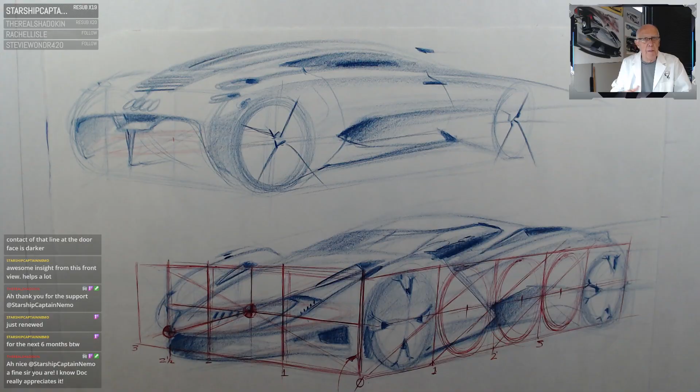That's all coming in the next series we'll do here in some of the execution work, not only for transportation design but everything else we're dealing with here on Twitch as well. So that's one way to keep it pretty honest. This, again, is a technique piece, a media piece, and it's all predicated on understanding perspective, how to drive it, notice how things begin to collapse and really kind of taper back, and how those 3 wheels back begin to set a proportion.

I think the other nice thing about this is you can take advantage not only of the traditional 3 deep, 2.5 wide, but when you move into things like this, you can really kind of cheat the proportion. And all of a sudden, look how much wider that beauty is. You can take advantage now of that whole thing.

Now I would love to know how to calibrate when we don't have wheels. Like Blade Runner spinners or a Star Trek vehicle. Yeah, there you go, that's kind of neat, we can do that too, Nemo. That's a great suggestion. Maybe we can take this whole platform and begin to move it into space vehicles and things that do not have wheels, and how to get those proportions set up as well.

So again, it still comes back down to, I think, the one common denominator we have in all of this: a really solid understanding of perspective. And perspective, to me, I've said it over the years and I believe it with all my heart, perspective is the genesis of illustration. It just screams from the corridors of creativity. It's impossible to do things successfully, well, visually, without a really good understanding of perspective.